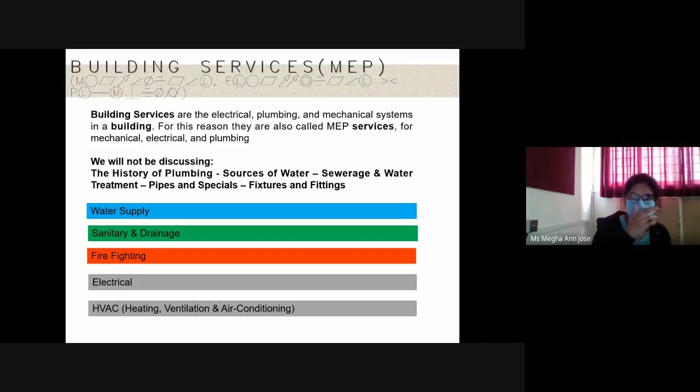The primary thing is water supply and sanitary falls under a scope called MEP. MEP is basically mechanical, electrical, and plumbing services. There is another thing called SMEP, which also includes structural design. So anything which is connected to architecture but does not fall under the broad category of architecture in this building is called MEP.

In this, I will not be talking about things like history of plumbing, where the sources of water are coming from, sewage and wastewater treatment, pipes and specials and other things. I'll be discussing primarily the conceptual part of how water supply is done, how sanitary and drainage is done, and if we have time, I'll even touch upon how firefighting is done. Electrical and air conditioning, I'm not talking about this time.

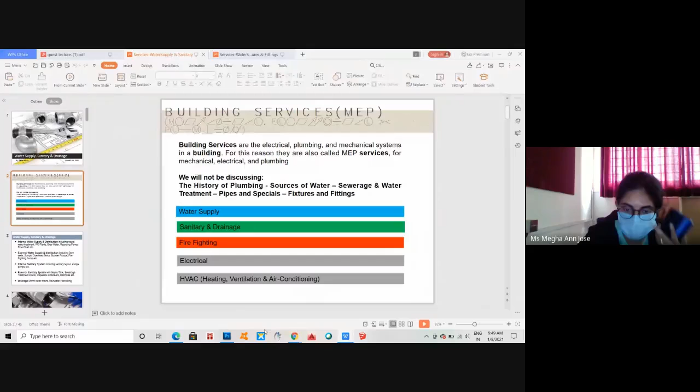Sir, can you hold on for a minute, sir? 1 second. Yeah, sure. Sir, I was not on mute, so I'm muting myself now. Okay. So shall I continue? Yes, sir. Yeah, Megha, I need to see the slide. I can't see the slide there.

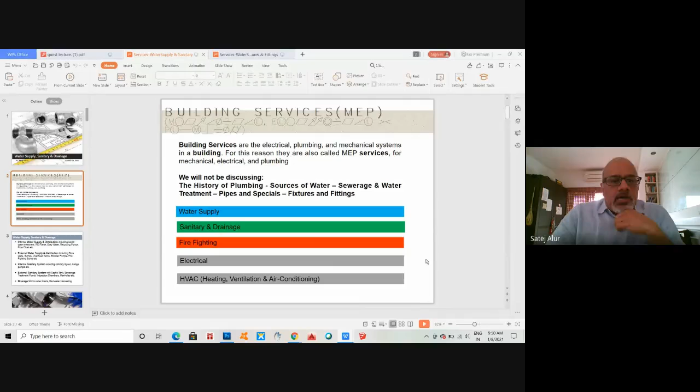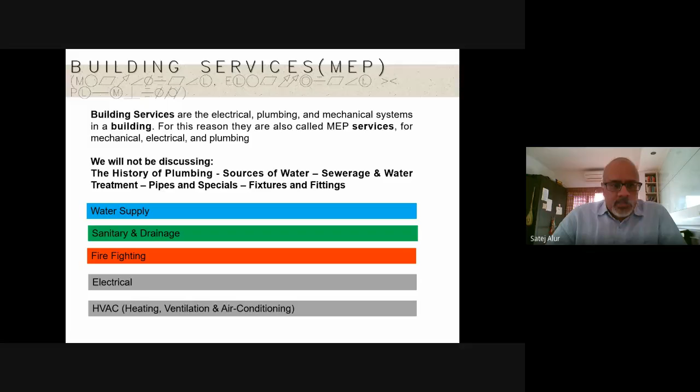So as I said, we are going to be discussing only water supply, sanitary and drainage, and firefighting. I'm not going to be talking about other things like history of plumbing, where the sources of water are coming from, sewage and treatment at the city level, or various fittings and fixtures. If you want, there's another PPT available for that which I can share later if time permits. So let's move on to the next slide.

So what are we talking about? When you talk about water supply and sanitary, there are 4 or 5 things you have to have in mind. One is the internal water supply and distribution line, which consists of wastewater treatment, the RO plants, the grey water recycling pumps flow chart. This is how the water comes from the main source, whether it's Kaveri, a borewell, or the corporation water system, how it comes into the building and how the plumbing is distributed within the building.

Then you have external water supply, that is between the source and the building, what other activities you have. Those are things like sumps, overhead tanks, bore wells, pumps, firefighting. All these are in between. That comes in the site area, not within the building plinth area but outside it. These are to do with water supply.

Similarly, you have the sanitary system. Sanitary is basically how the wastewater, sludge or sewage is taken out from the internal part of the building. And you have an external sanitary system, from the building to the main manhole or to the treatment plant. The fifth thing is drainage. Drainage is basically excess water which is not connected to your plumbing or sanitary, stuff like rainwater and roof water which is collected, and how that goes into a main drain.

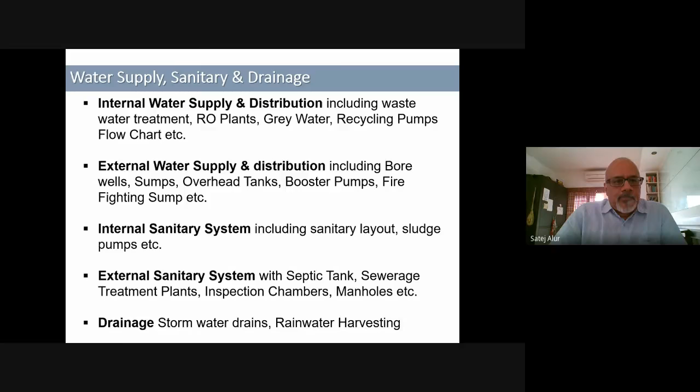So in every site, I'm going to be concentrating only on the connection to your site, from your site onward. At a larger scale, this is the city level. But once it comes into your site, the first point of contact would be through the main domestic line, and then through a domestic meter. Your domestic line and domestic meter will be specific to your particular site. That meter tells you how much water is coming into your property, and based on that, you pay the bill. That's about it, right? Next.

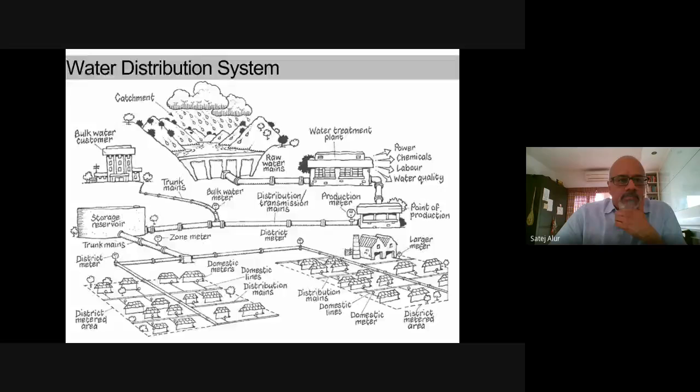So basically all this is what you call potable water. Potable water is water which is usable for drinking purposes, and it will be separated from your unsafe water sources. That means it will not be connected to any other kind of water source. It comes directly from the Kaveri water in Bangalore, or from your borewell, and goes directly into your consumption area, right?

Then you have the water provision: plumbing fixtures, devices, other things which are meant for using the specific water. Each of these is designed according to its function and also according to the water pressure. All your plumbing systems should be kept in such a way that they're easy to maintain and in serviceable condition, right? And you should have accessibility for all these plumbing fixtures, so that all the devices in the toilet are located for easy access. This is just a general note. Let's go on. Next.

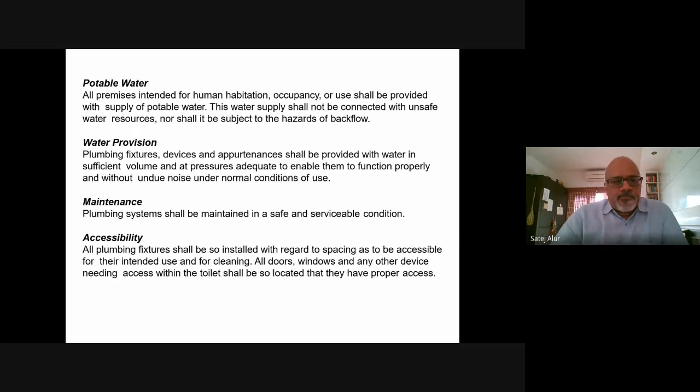So NBC has got a lot of codes. As I told you, this is a little technical, so I'm not going to dwell on it too much. But basically the NBC code is for you to calculate exactly how much water is required for a building. They calculate the number of liters per head per day. For example, if you have a house of 4 people staying, you consider a minimum of 70 to 100 liters per day.

So if you take 100 liters per day per person, that means you require about 400 liters per day. You normally consider about 3 or 4 days of storage. If you take 3 days, that is about 1,200 liters of storage. So you design your whole tank size, your sump size, and your piping size, everything based upon the number of people who are going to use the particular facility.

Okay. Similarly, a lot of these liters are also flushed out. Obviously, all the 100 liters is not going to be used completely. Most of it is used either in the commodes or in the wash basin. A lot of this is taken out as a flushing requirement. So about 40 to 45 liters per head is taken out. That can be reused and recycled and then used again for other purposes. This is how you save water.

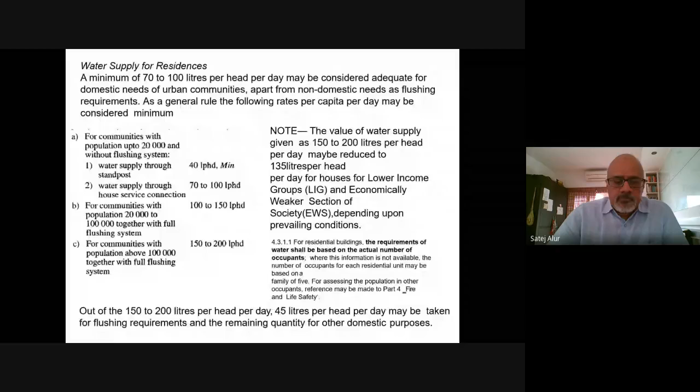Okay, that means of the entire 100 liters coming into your house, only 45 liters will be getting out. The balance portion will actually be consumed or cannot be reutilized. Okay, next.

Megha, can I do a cursor? Can I show the cursor?

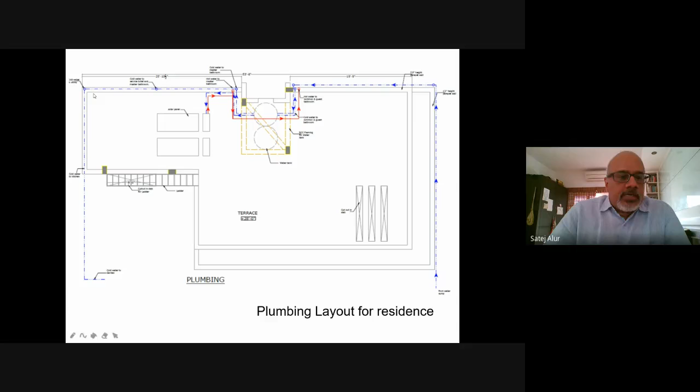So this is another sample of a plumbing layout. So similar kind of a concept where the solar is much more easily accessible next to the overhead tank. And the red line, what you see is the solar line. And the blue line, what you see is basically the cold water lines. The depiction also is just red and blue, mostly, and it's easy to understand, right? So you have 2 different source of lines here. Next. Okay, so that is the layout for a plumbing area.

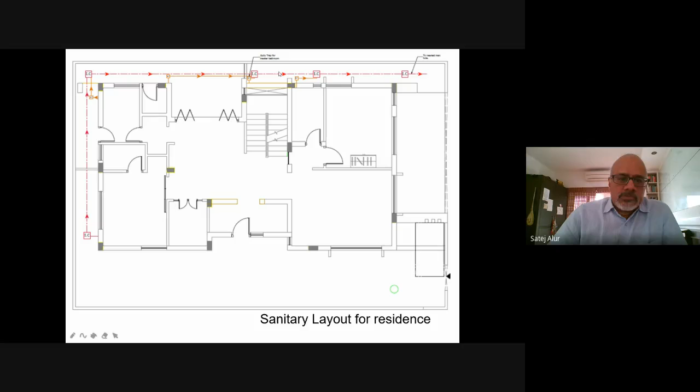Along with this, you may have things like a shower. You may have a bathtub. You may have a jacuzzi, and basically this constitutes all the kinds of bathrooms. And you may even have a his and her wash basin. It all depends upon the size and all that. And it basically calls for a better layout. The better the layout, the easier the plumbing, and the fewer cross plumbing lines there will be. Next.

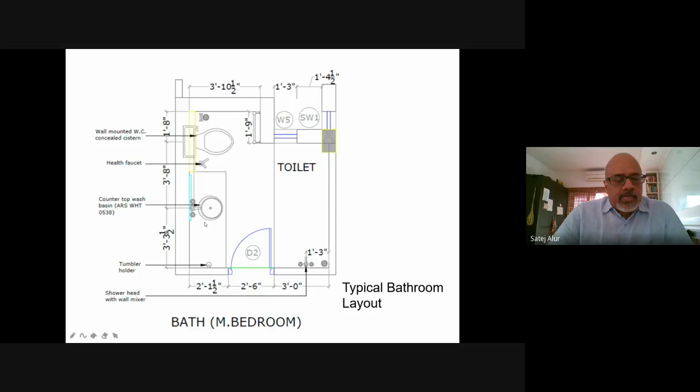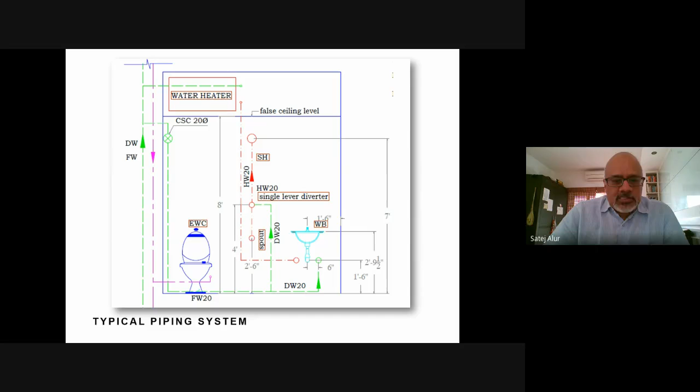And all these pipes have different diameters, and they're made of different materials and all that. I think you can see that in the next PPT if there is one. You have different sizes of pipes, but you don't need to worry about that at present. Next.

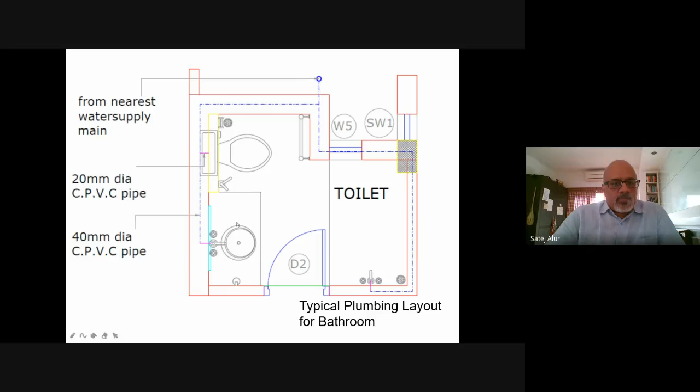And in sanitary, the plumbing line basically comes through the walls. It is all concealed behind your tiles. The sanitary line is taken below the flooring. So either the toilet is a sunken portion, or you will have a false ceiling in the lower floor, and the lines are taken there. It is not shown here, but generally you have a separate line for the commode and a separate one for your bath, that is your wastewater. Your wastewater is primarily wash basin water and shower water.

So all the bathroom water, the water used when you wash the toilet, is connected to a 75 mm pipe, that is about a 3 inch pipe. Whereas your commode is connected to a 110, that is 4 inch. That is called a soil waste pipe, PVC soil pipe. The soil pipe goes directly to the inspection chamber.

Whereas all the other sanitary lines go to a gully trap, and the gully trap goes to your inspection chamber. This is in the other section where we talk about inspection chambers and gully traps. There are various types, which you don't need to worry about. The simple logic is that the commode water, the sewage, goes to a different pipe, and all your others, nahani trap, wash basin, urinals if there are, and your shower area, go to a gully trap before they go into the inspection chamber. Okay. Next.

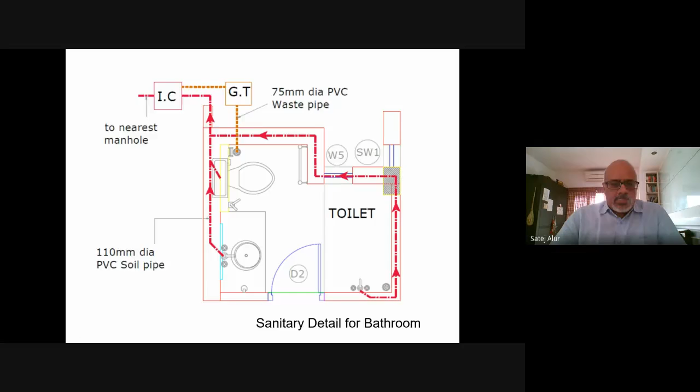So this looks a little complicated, but it's not. It's a simple flow chart of how a plumbing diagram works in a typical house, which has got a ground, first and second floor. The terrace floor is where your overhead tanks are, and this is a vertical cross section of the plumbing diagram layout which I showed you earlier. The layout showed you the pipes along the roof; this is a vertical representation of that, and how each pipe comes to various bathrooms or kitchens, or even utility areas.

So for example, you have a washing machine, so you'll have one pipeline coming down there. You have a garden area, so you may need to have one line connected to the garden area. So like that, you have various things. This is how it's typically done for any particular residence. This shows you the direction in which the pipes go, and exactly where you require different valves and different fittings fixed there.

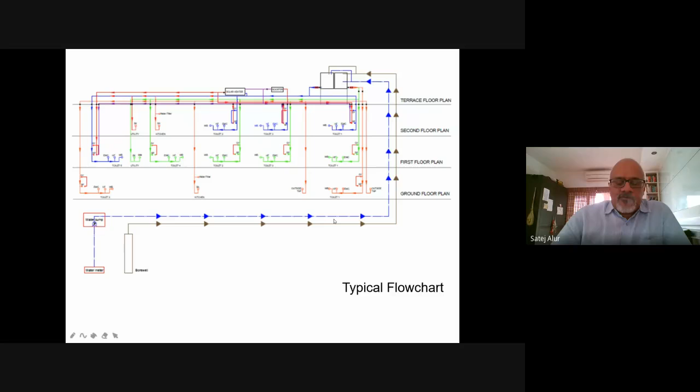Next. Okay, this is for a residence. So I think we can just pause here, Megha, and see if there are any questions regarding this basic thing, and then we can move on to multi-story building.

Do you have any doubts? If you have any doubts, please raise your hand and we'll clarify it now. Or write in the chat box. Okay, they don't have. We will continue. Yes, sir.

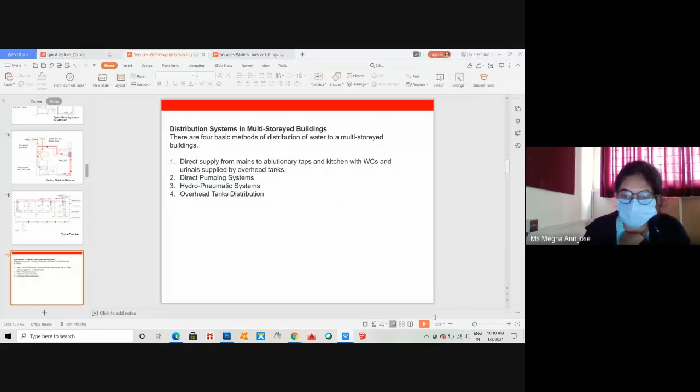Yeah. So what I talked about is a single residence. The concept is very similar when you go for a multi-story building. So what do you mean by a multi-story building? Basically, it's a high-rise building full of flats, or a commercial building, or a hotel, or any of these kinds of buildings which require a lot more. It cannot be a simple system like a sump to water tank and water tank to the various fittings. There are different types of distribution systems. Again, the concept is very similar; it's just that they use different technology. There are four basic methods.

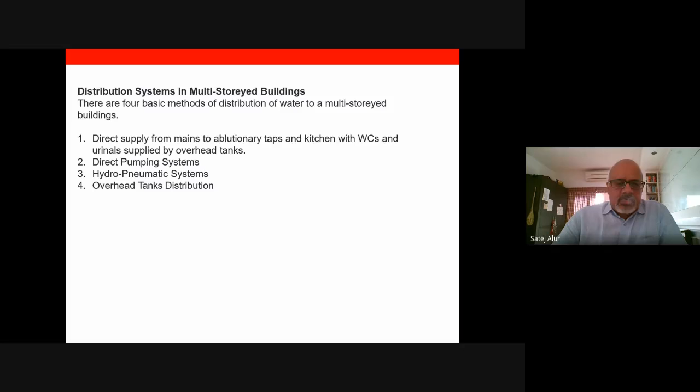One is direct supply. Let's go to the next slide, Megha. A direct supply system is for low-rise buildings actually; it doesn't really come under multi-story buildings. This is basically abroad, where you have high pressure of water in the main pipe itself. When you have high pressure water, you don't need to pump the water up. The pressure itself is enough to take it to your uppermost floor, so you don't need any overhead tank at all. Of course, this is not applicable much in India because the water pressure is extremely low.

Then you have a direct pumping system, where a pump is used at the bottom level itself. Directly from the sump they put a pump, and the pump directly feeds the fittings of every floor. Again, there is no overhead tank. This is also not used in our case because if there's an electricity failure, this will not work, and there is no gravity. Power is constantly being used because a constant pressure has to be maintained in all these pipes. Abroad, a number of places don't have a problem with power. So these two kinds are not really utilized in India.

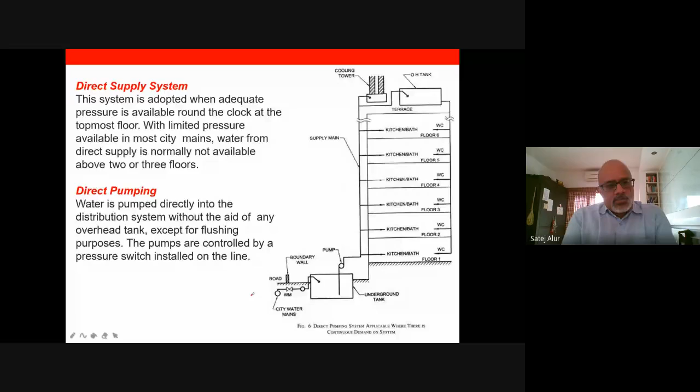The next one is a hydro-pneumatic system. It's a pumping system primarily. This keeps the system under high pressure, so it gives a lot of pressure, and again there is no need of an overhead tank. Most of the bigger complexes in India now have this kind of thing, especially large commercial complexes or hotels where cost is not a factor, rather than keeping the entire building running on an overhead tank.

There are a lot of other issues of maintenance and cleanliness with tanks. And of course you get variable pressure, because the ground floor is different from your 6th, 7th or 8th floor. As you go lower down, the pressure becomes higher and higher, so the people on the upper floors will not generally get a good shower or good pressure. In that case, they use this hydro-pneumatic system, which keeps the pressure in all the pipes the same, so the water pressure for all the fittings and all the floors will be pretty much the same.

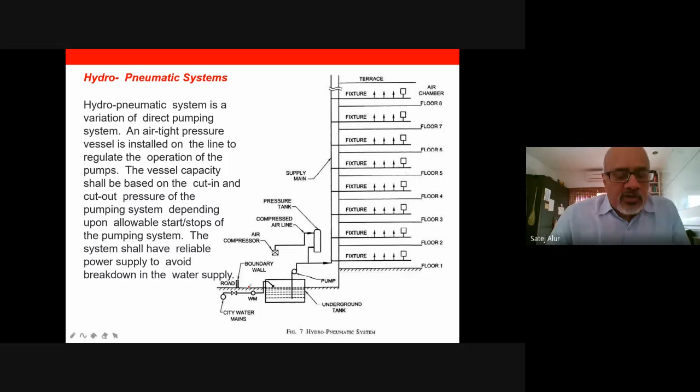So it really doesn't make a difference which floor you're on. You primarily see this in hotels, because they have staying facilities even on the top floor. Even in apartments, you will find that the upper floor people generally complain about getting low pressure. So that's why you have this hydro-pneumatic system, which will eliminate this, right?

Then the fourth thing is the most common thing which we have in India, which is basically for 3 or 4 floor buildings. You have a pump which pumps it to the overhead tank. So you have two tanks: one is the sump and one is the overhead tank. And from the overhead tank, it is all fed by gravity. So again, this is gravity.

So the pressure is pretty much not equal everywhere, but it is effective enough. This is how it is done whether it's a single story house, a multi-story house, or even an apartment complex, in India especially, right?

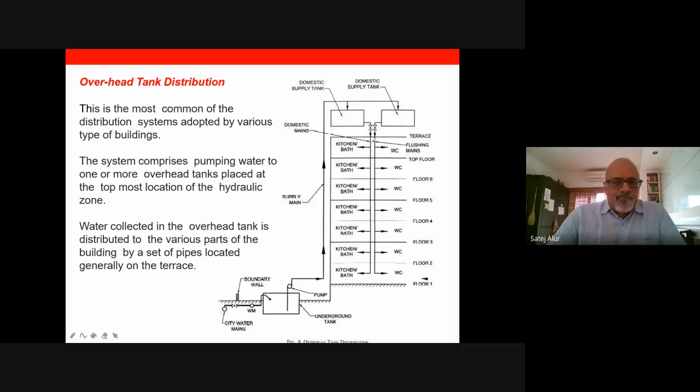So again, coming back, when you have multiple toilets next to each other, with the plumbing line what happens is that you have these cold water and hot water lines coming to a common source and they're distributed between the two toilets. So this is when you have 2 or 3 floor toilets, one on top of the other or adjacent to each other. The same plumbing line can be used for distribution between 2 bathrooms. Okay, next.

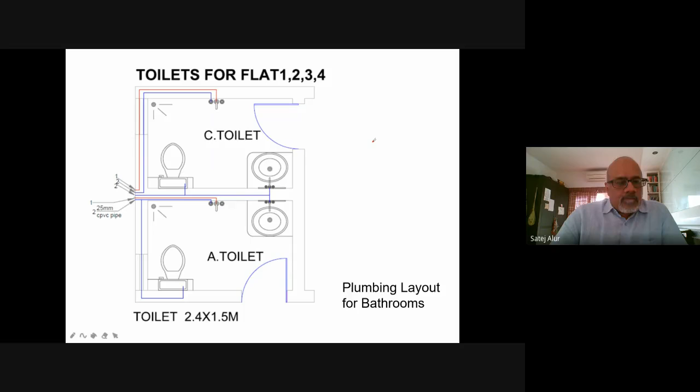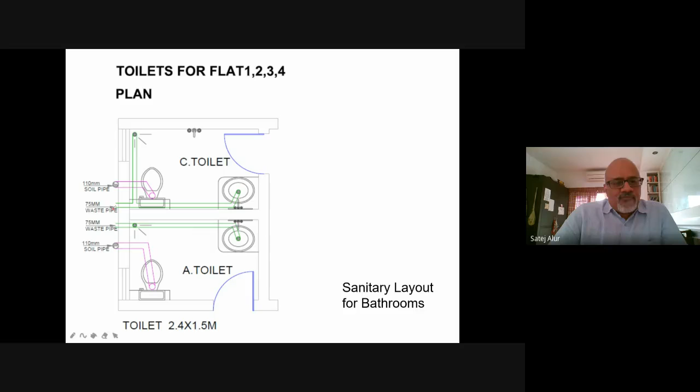Similarly with the sanitary line. The sanitary line is generally taken separately, but they are connected outside the building. If you see sanitary lines outside, you will see some diagonal pipes. Those pipes are connecting from one bathroom to the other bathroom. The purple line is the commode, that 110 mm soil pipe, and the green lines are the flush, the nahani trap, the wash basin pipes and the bathing areas. That's connected separately. You can also connect both the bathrooms together, but for ease of purpose, it is usually separated. Next.

So in a multi-story building, the concept is pretty much the same as a residential one, but the number of inspection chambers and gully traps increase drastically because there is a certain slope ratio which is taken. For the sanitary line, every 100 feet you have a 1 foot drop, and every 20 feet you have an inspection chamber, so that at no point is there clogging in the pipeline.

Along with the sanitary line going along the building, you will also have rainwater pipes. The roof rainwater is part of your drainage. That gets distributed along the site into rainwater chambers, or it goes into an underground sump. And the sanitary line gets connected either to an external sewage line, a septic tank, or a sewage treatment plant.

If the site is very big, or you have multiple buildings in it, it is normally taken to a sewage treatment plant. This is decided by BWSSB. They will tell you whether you need a sewage treatment plant or not. Of course, if the cost permits, you can do it yourself. Otherwise, they will tell you that for a certain area you're required to have a sewage treatment plant. So the flow diagram is pretty much the same.

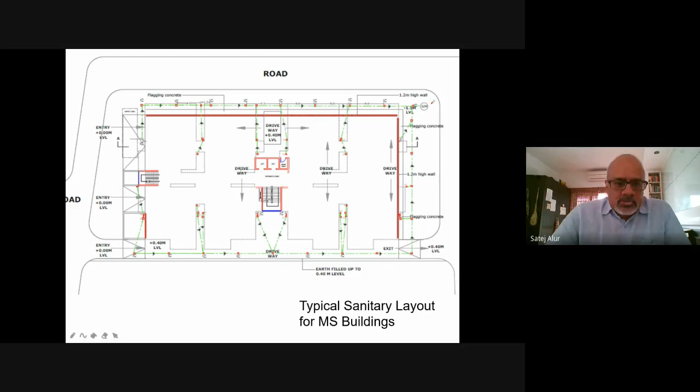All you have to do is join all the toilets with a line outside and connect inspection chambers wherever there is a turning of the pipe. And if there is too long a distance, make sure that every 20 feet there's another inspection chamber. That's all. It's a very simple diagram which you have to do. Next.

Sometimes what they have is a ring main. They have one ring all around the building on the terrace, which basically gives equal distribution of water. And from the ring, they have taken lines out to each and every flat. Because if you have a separate line for each flat, sometimes there is a problem in one of the pipes, maybe one of the pipes is burst, or there's a problem with the valve, then that particular flat will not get any water at all.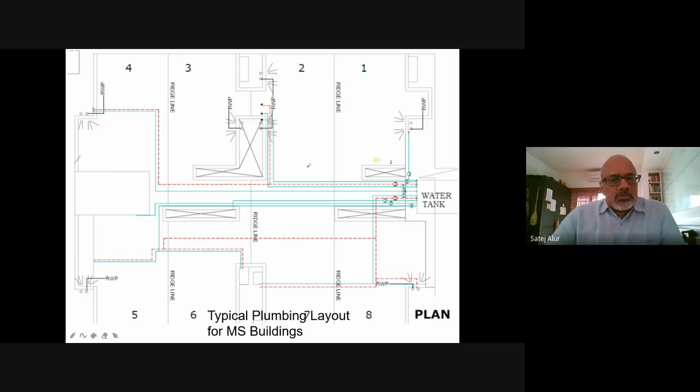So what they do is they have a ring main, and that ring main is given a certain pressure, and that pressure will come to all the flats equally, and none of the flats will have any problem getting water. If at all there's a problem, the entire building will have a problem. Right? Next.

So again, this looks complicated. It's similar to your flow chart for a residential building, but as you see, most of the floors are typical in this. So every floor has pretty much the pipes coming down, and vertical pipes are distributed at every floor, and they distribute hot water as well as cold water separately. So for each vertical section, you'll have one toilet or kitchen or utility. The pipes are separated out.

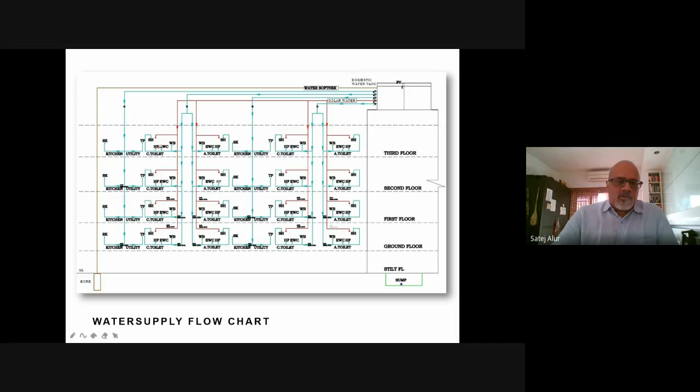So of course, in a smaller residence, you have a thing called a sump. Whereas in bigger complexes, you have a larger sump with a fire tank and a pump room. So these are very large areas which require constant maintenance and care, and you have different pumps for distribution. And then also you have the treated water.

Sometimes you have excess water which is coming in. Like when you take a bath, obviously 90% of the water pretty much goes into the drain. So that goes into a thing called gray water. The gray water is treated, and that can be reutilized again, either for gardening, or for car washing, or back into the commodes, so that the flushing system will work. So there is a dual piping system. That's what it's called.

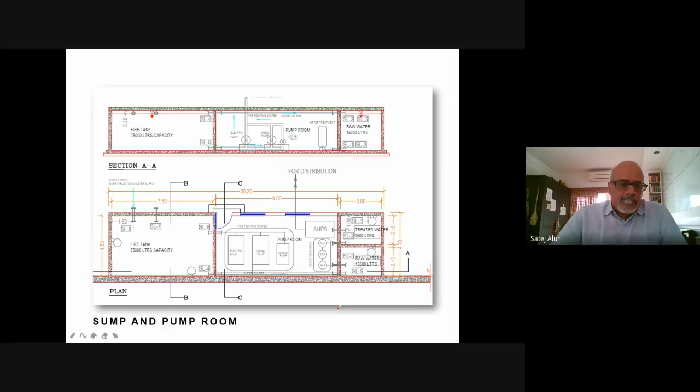The raw water comes in, goes to the overhead tank. It comes to a shower. From the shower, the excess water goes into the drain. The drain goes into another pipe, which goes to a water treatment system. From that water treatment system, it's pumped into another tank on top. That tank is fed directly only to the commodes, and that is flushed out. So it's a little complicated system if you go for larger complexes. Right? Next.

So coming to sanitary and drainage now. Basically, this is outside the building what we're talking about. Outside the building, you have your main household wastewater which is coming in, from your commode and shower and everything like that. That goes into your sewer pipe, which I told you is laid below the main road in front of your building, the underground system, right?

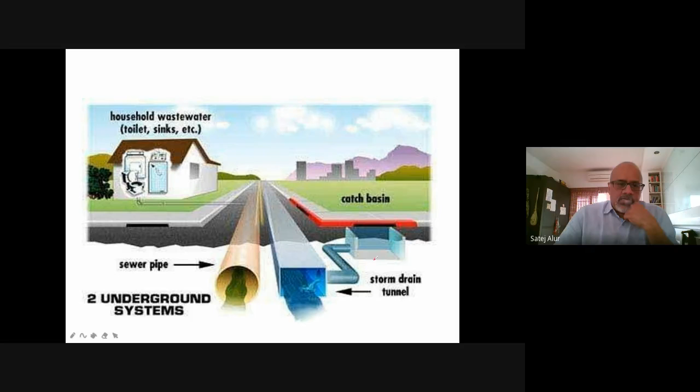And you have a secondary system, which is basically a stormwater drain. This is for your rainwater. So you have a catch basin, and the rainwater comes there and then flows into the underground system. This is outside your building we're talking about, right? Next.

So this is just a graphic showing how a basic pipeline is connected to various parts. This is a three-dimensional representation of the two-dimensional working drawings which I showed you, right? So you have your commodes, your wash basin, and your bath and shower area. And the light gray lines are the plumbing lines which are coming in, the cold water and the hot water line.

And the dark gray or black lines are basically the underground drainage, which goes from the commode and from the wash basin and the bath area.

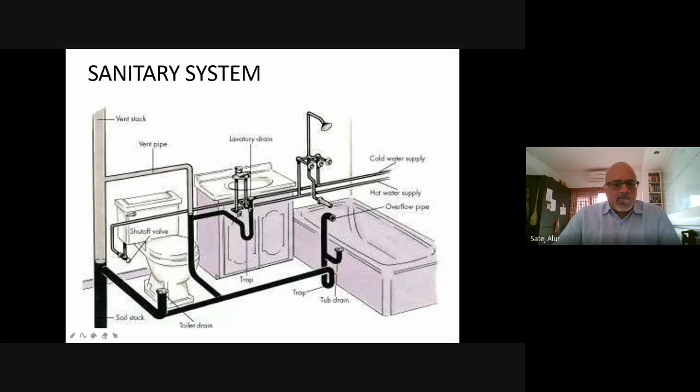Next. So this basically shows what a drainage system is called. It's basically the conveyance of wastewater from the WC, bathroom and kitchen to the municipal sewer system. It's called a house drainage system. That's all. We don't need to get into this. Next.

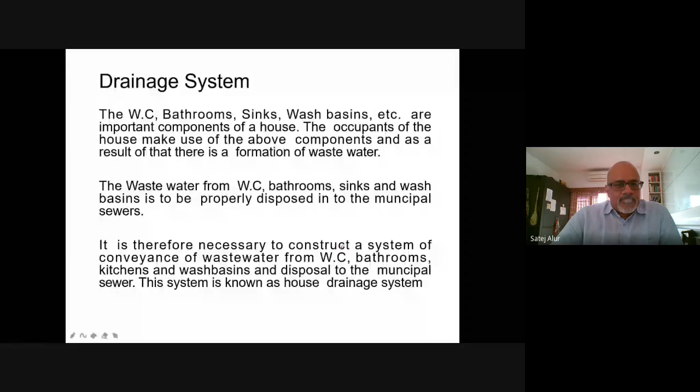This is another graphic just showing you how the sanitary line is connected. So if you see the main line, sanitary sewer lateral, which is shown, that connects to the access manhole. The manhole is basically a place where a man can get in. So it's a much larger inspection chamber. The inspection chambers are normally only about 600 by 600 mm, but the manholes are much bigger.

They're about nearly 2.1 meter depth, and up to about 1.2 meter. They can be either rectangular or round, and they basically allow, with a ladder inside, for a person to go in and clean the whole pipeline system.

Similarly, you have roof drainage. So the rainwater which comes in is basically collected along a filter and then taken. That can be either put into a catch basin, and that may be sent to the main line, or it can be sent to a dispersion trench or a rainwater chamber, from which you can utilize the water again. Next.

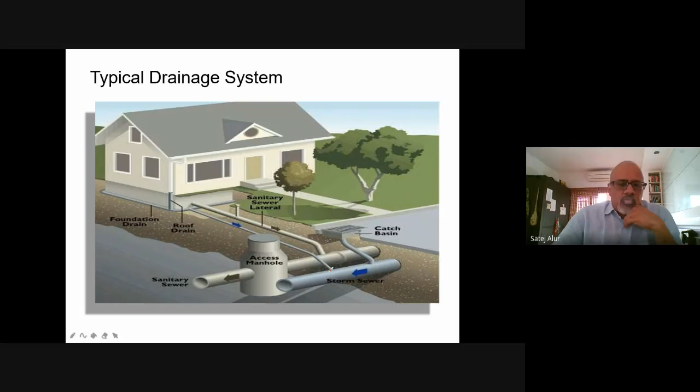Okay, there are a lot of terminologies which maybe I should have started off with, but basically wastewater is the water which is used and then becomes waste for domestic purposes. It has a lot of other chemical, physical, and biological impurities in it. So that's why it's called wastewater, and that is why you call it wastewater treatment. So the treatment of this water basically becomes grey water, and that can be reused.

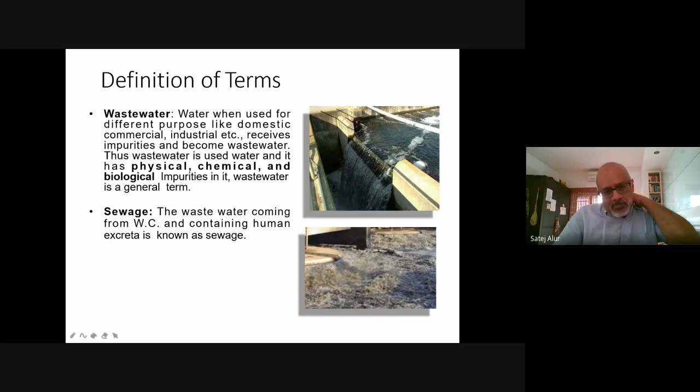Sewage is the wastewater coming from the commodes. That is basically when you go to the bathroom, the commode, that is the sewage. So that pipeline is usually separated out and not mixed with the regular wastewater. This is what I showed you, the two different pipelines. One is 110 mm and one is 75 mm. So these two are separated out.

Going to the next. There is a lot of other terminology, like sullage: wastewater from the bathroom and the kitchen is also known as sullage. Then the plumbing system, sewer pipeline. I think most of this you already know, and I've already explained some of them. The main thing is the manholes, which I told you about, and the traps. Traps are basically like a gully trap. And there are grease traps and the other basic traps, which I will come to a little later.

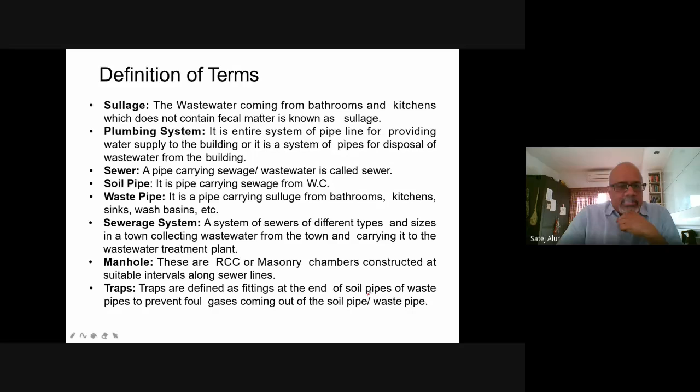Next. Okay. This is again a simple system of plumbing for house drainage. I showed you the different types of plumbing for water supply, how the water supply is done. You have the hydro-pneumatic system, you have the direct supply system, and those items. This is basically how the drainage system works. There are basically 4 types of drainage system. Go to the next slide.

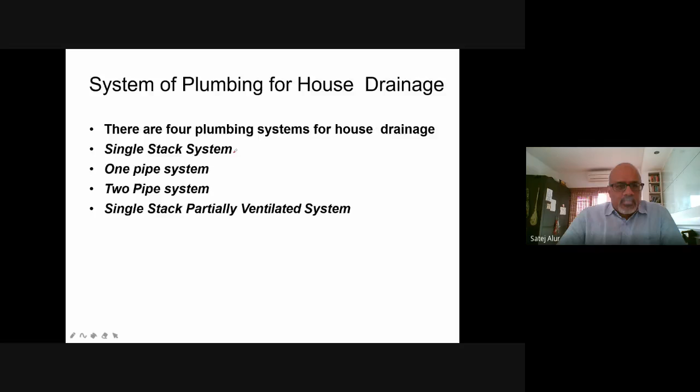So you have a thing called a single stack system. As you can see in the diagram, you have only one pipeline going all the way down. This is a very poor way of doing it. It used to be done earlier. It's not done now because if there's any trap of air or waste stuck in the pipe, there's no way to get rid of it.

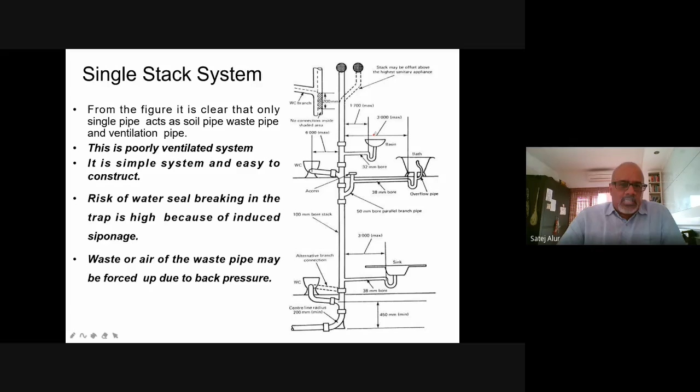And remember, all these things have a lot of gas in them because of methane production. You have a lot of gas, so there is a chance of gas getting trapped. You don't have any kind of vent pipe, so it's a very poorly ventilated system. So generally, this is not in use anymore; it is just a system which was there earlier. Next.

So you have a one pipe system. If you see, there's a separate pipe there called a vent pipe. The vent pipe is connected to all the fittings, but it goes to the terrace and is open there. The reason is that all the gas goes out, and when there's no air in the pipes, the sewage goes down much more easily.

Otherwise, there will be an air blockage, and it will be very difficult for the pipe to stay clean and work properly. And this is a little complicated system because you have vent connections for each and every fitting, with one pipe going up. It is only one pipe which is connected to all the fittings in the various houses. So it's a little complicated. This also is generally not done. Next.

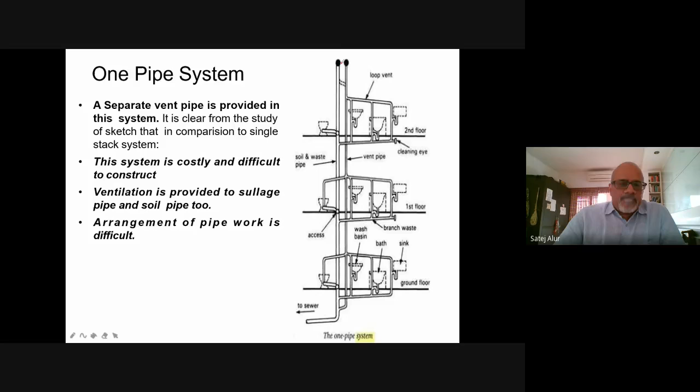So again, this is a 2-pipe system where your wash basin and your kitchens and bath, all these are connected separately, and the soil waste is separately. So 2 vent pipes are provided, one for the bathing area, the wastewater, what I told you, and one for the sewage area. So there are 4 stacks. It is generally what we normally use, but there is also another option which is called a modified stack system. That's the next slide. But yeah, so basically single stack partially ventilated system.

So here the partially ventilated, if you see, is basically all the pipes connected to a certain commode system are connected to one vent pipe, and that vent pipe goes up. So only the water closet traps are ventilated. So either we use the previous one, we have a stack system, that 2-pipe system, or you have a single stack partially ventilated system. But generally we use the 2-pipe system. That is the previous slide.

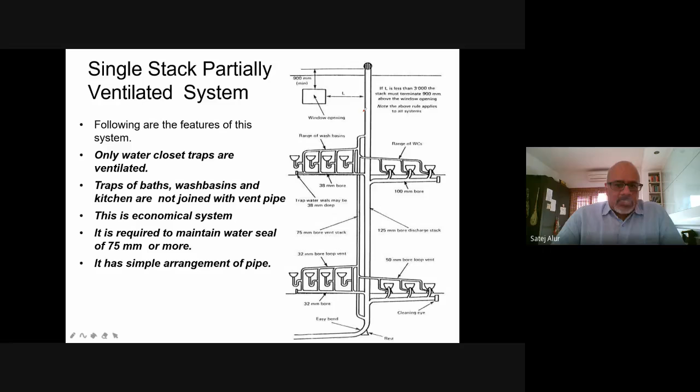Let's go to the previous slide. Yeah, the 2-pipe system is generally what is normally used. So the commode, the wash basin, and all these are separated out, and your EWC, your commode thing is separated out. And the vent pipe is separated for your commode areas. So you have basically two vent pipes, one for the wastewater, one for the sewage, and you have 2 vertical pipes. Yeah, next.

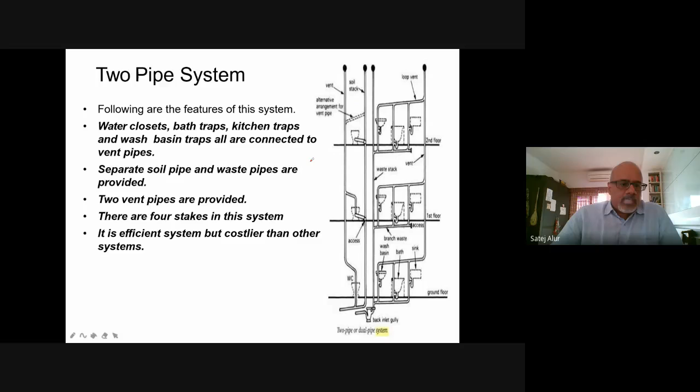Yeah. So simple notes which you need to keep is, it should be as simple as possible, no crisscrossing of lines, as much as possible a straight line. All your vertical pipes should be preferably vertical, and horizontal should be as far as possible horizontal. You can have it at the most diagonal, but that cannot be less than 45 degrees. Otherwise, there'll be a problem of choking. Okay, wherever there's a change in pipe, an inspection chamber or manhole has to be provided.

Then sewers should not be laid under the building. So you try to avoid it within the plinth area of the building, because in case you need to clean it, one problem is accessibility. Second is if there's any leakage, there's a problem of smell and those things coming within the house. Okay. And obviously the pipe should be laid in the proper gradient and slope, because we're talking all about gravity flow. So it should be laid properly so that the proper flow will take place. Next.

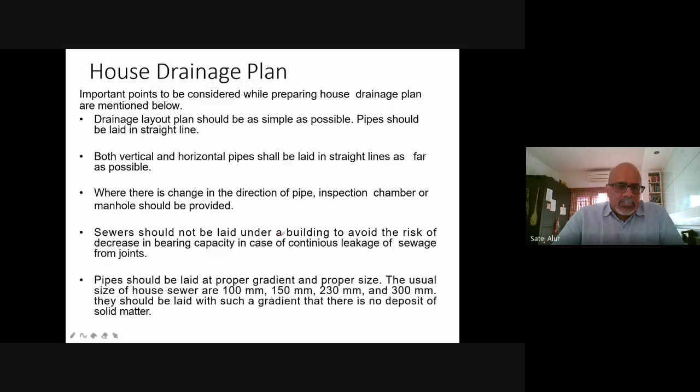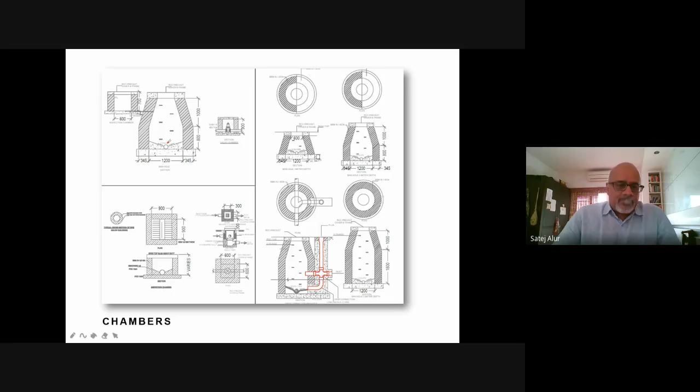Yeah, this is coming to the firefighting part of it. So let's again pause and see if there are any questions about water supply and sanitary. And Megha, in case I missed out anything, you can just... Students, do you have any doubts? I see that there are a few students from the senior batches too. If you have doubts, you may raise your doubts now.

Megha, do we have time to do the firefighting? Yes, sir, no problem. We can continue. They don't have doubts, so we can continue. Okay. Firefighting anyway will not take too much time. We'll just finish it off and then we can open it up. Yeah.

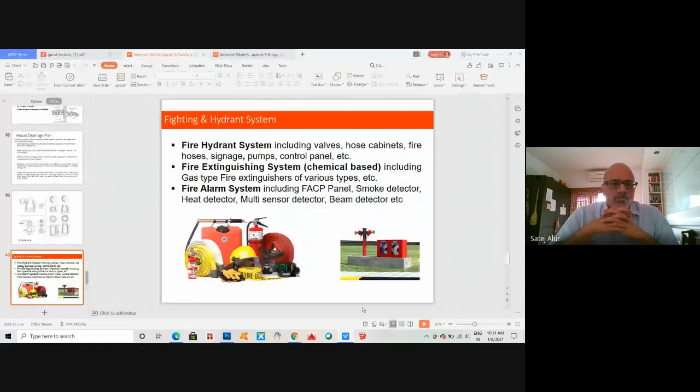So firefighting is something different, although it is not part of your water supply and sanitary. It comes under MEP, that is your mechanical, electrical and plumbing services. And firefighting is basically required for high-rise buildings, and especially in places where a person cannot get out easily. And we do not generally do it for individual residences, except for maybe extinguishers and those kind of things. You have basically three types of systems.

One is a fire hydrant system. A hydrant system is basically a piping system again, which is fixed piping, which has water in it all the time, and it has got sprinkler systems throughout the whole building. So the entire building will basically have a fire hydrant system, and at any point, if there is a fire detected anywhere, the fire hydrant system will take off, and then that will sprinkle water in that area.

That's a hydrant system. Then you have a fire extinguishing system. Extinguishing systems are basically different types of systems which put out the fire. Even though your sprinklers are basically to do with water, your extinguishing systems have got to do with various types of gas. So you have these extinguishing cylinders which are kept out for different types of fire. You have oil fires, then you have paper fires and gas fires. These kinds of systems are there.

The third thing is an alarm system. Alarm is basically a hooter system and a public address system. So in the public address system, the alarm is detected by a smoke detector, and that will send a beeping sound to the entire building, and that will give a warning signal to the people. So those are the three types of systems we're talking about. Next.

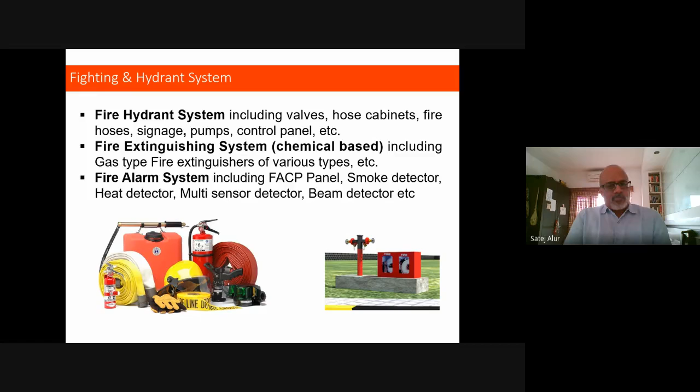Because this has to keep the water under pressure, the pressure is kept constant, and in case any of these different points which are there in every room detects a fire, there's a sprinkler bulb which basically splinters, and once it splinters, water gets gushing. That's when the pumps start and send additional water to that area, so the entire area gets flooded. So this is a very expensive system, but it is mandatory for high-rise buildings.

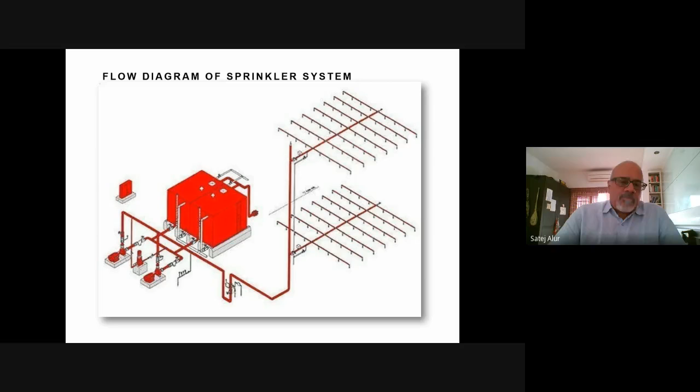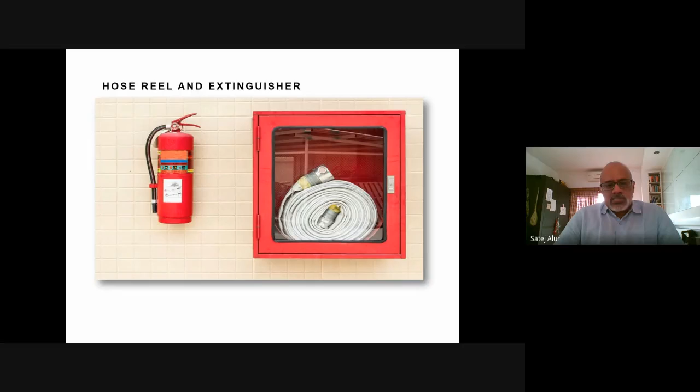So this particular line will always have water, and you basically take out the pipeline, connect it to the hose pipe, and then you can rush into any room and start spraying the water there. This is an alternative to the sprinkler system. The sprinkler system, as I told you, is very expensive and it has to be maintained, whereas this other system is cheaper.

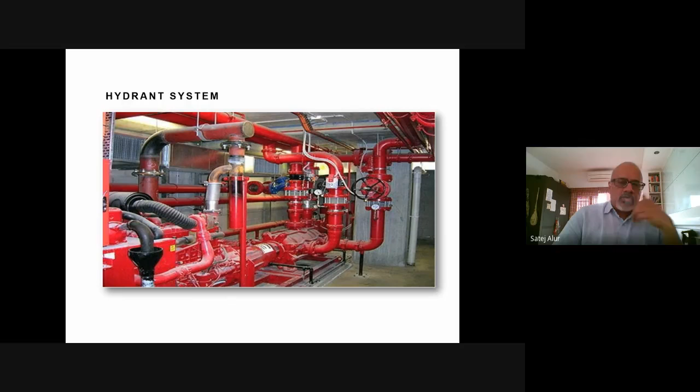Next. So the fire alarm system is different, as I told you. There's a different system where you basically have smoke detectors, and other things called beam detectors and heat detectors. So there are different detectors which basically detect the presence of any kind of smoke or fire. Once they do that, they send a signal to the fire alarm panel, and if it's a complicated panel, it will also tell you exactly where the fire started.

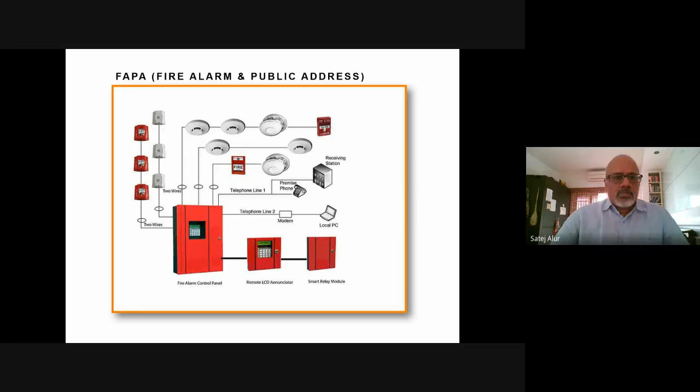Otherwise, if it's a simple one, it has a hooter system, a beeper system, and it'll start sending an alarm throughout the whole building saying there's a fire in the building. That's when you have to evacuate the building. That's called a fire alarm and public address system. Next. So that's it, Megha.

So now we can open it up to any questions, or in case I missed out something, you all can add. Yes, so we ourselves have posted a few questions because we feel this is something that they have not asked. Okay. So, sir, these are a few things. How do you unclog a blocked drain pipe? That is one of them. Okay.

And the other one is, where are sewage treatment plants located? Okay. Say it's a multi-story building. Would it be in the basement, or would you prefer it to be on the side, on the ground floor? Okay. Let's do one question at a time. So the first question is basically how you unclog a drain pipe, right? Is that what the question was? Yes.

Basically, if a drain pipe is getting blocked, there are 2-3 reasons. One is in terms of the slope and all that. Generally, a drain should never get clogged. But there are chances it happens because people put stuff into the commodes which is not allowed, things like diapers, sanitary napkins, and toilet papers. All these go into the commode, which basically clog up the pipe.